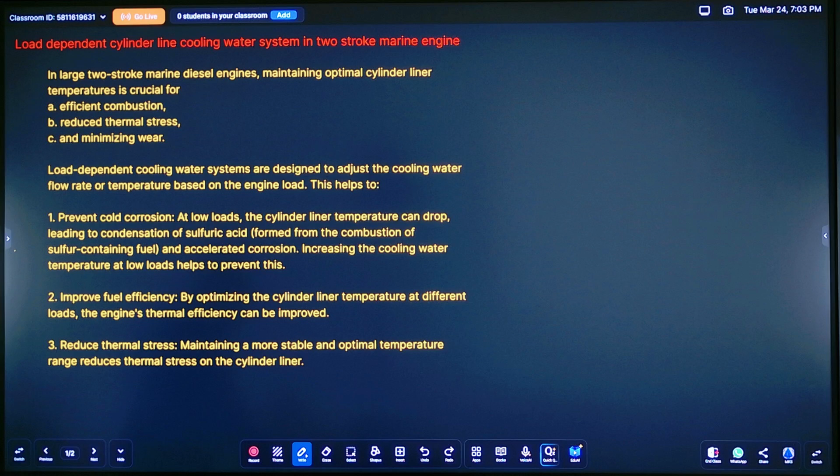So let us learn about the load dependent cylinder liner cooling water system in two-stroke marine diesel engine.

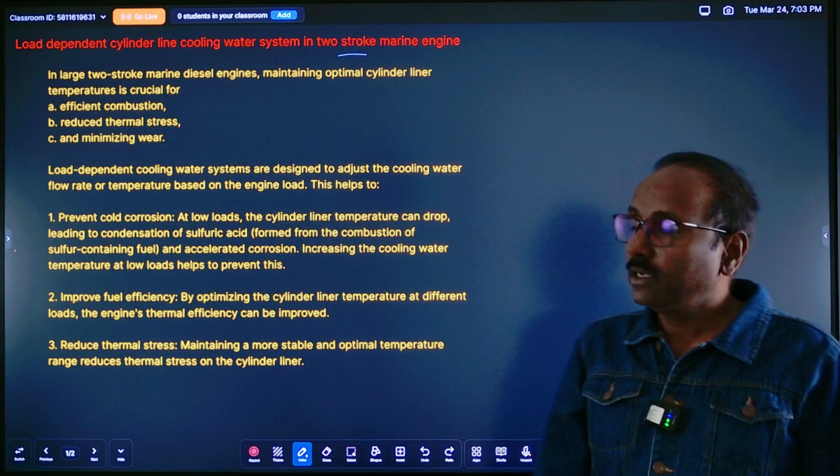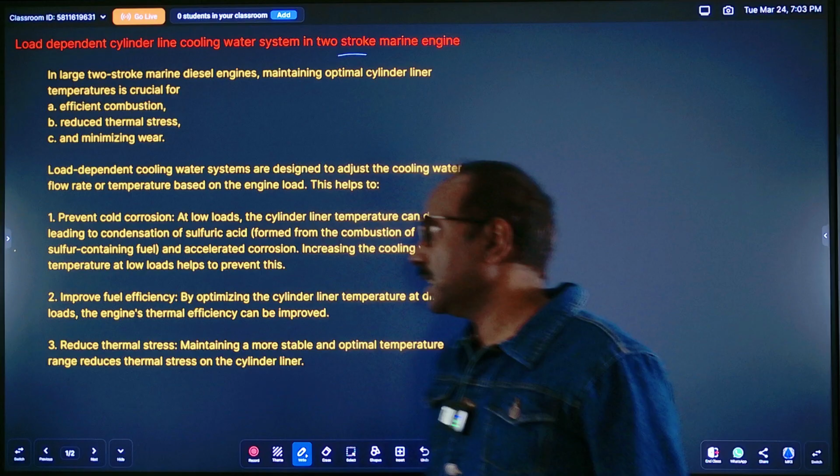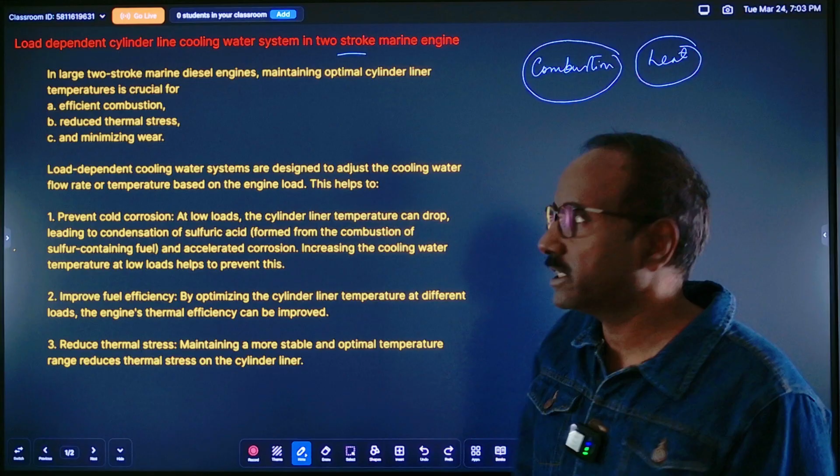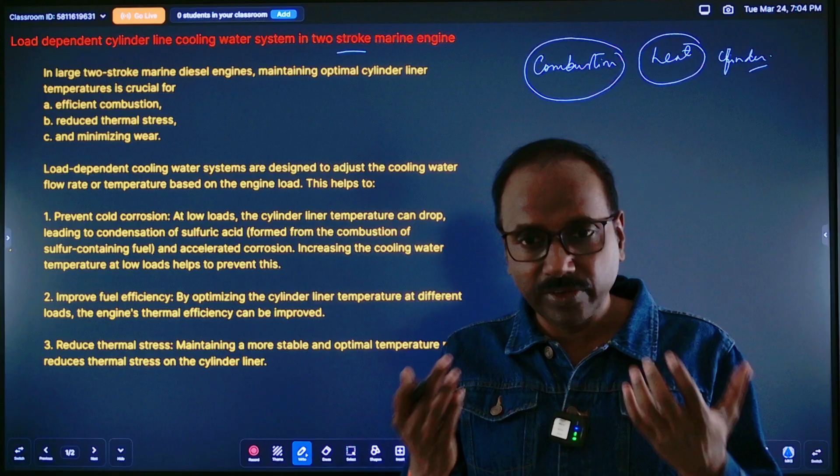See what is happening in this. Why do we need first the cooling of the cylinder liner? Because inside the cylinder liner combustion is taking place. Due to this, heat is getting generated. So this heat will keep on transferring to the cylinder liner if we don't have cooling water system. So the liner temperature, the cylinder head temperature, your exhaust valve temperature will keep rising, rising, rising, because you're not taking away the heat from these surfaces where the heat is being transferred from the combustible gas, the combustion.

So for that reason, cooling water is provided. For that reason, cooling water system is provided.

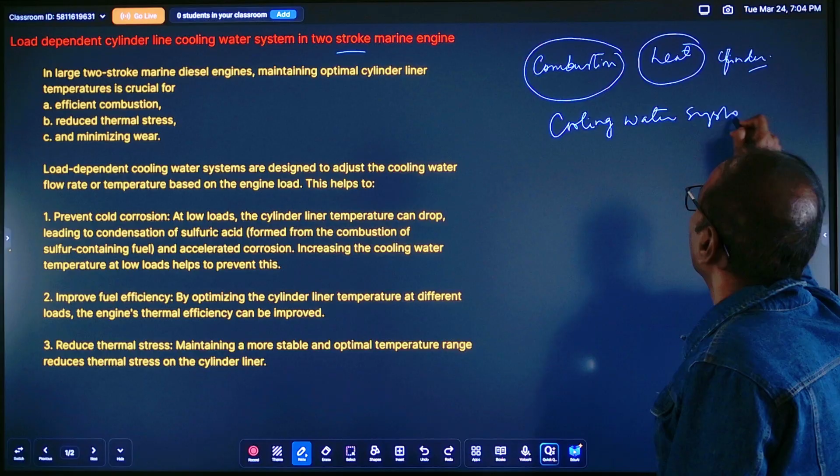In conventional system, the cooling water was sent through the jacket which is surrounding the liner, and after coming out from the jacket it was entering into cylinder head and then to exhaust valve, cool down and return back to the expansion tank through the orifice.

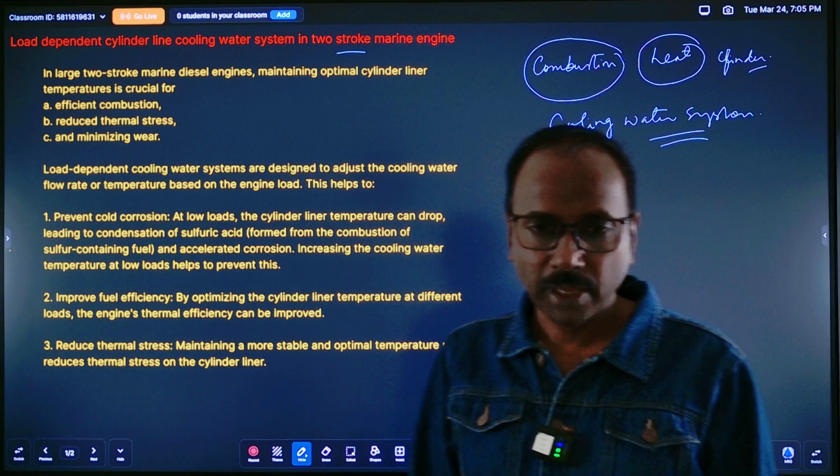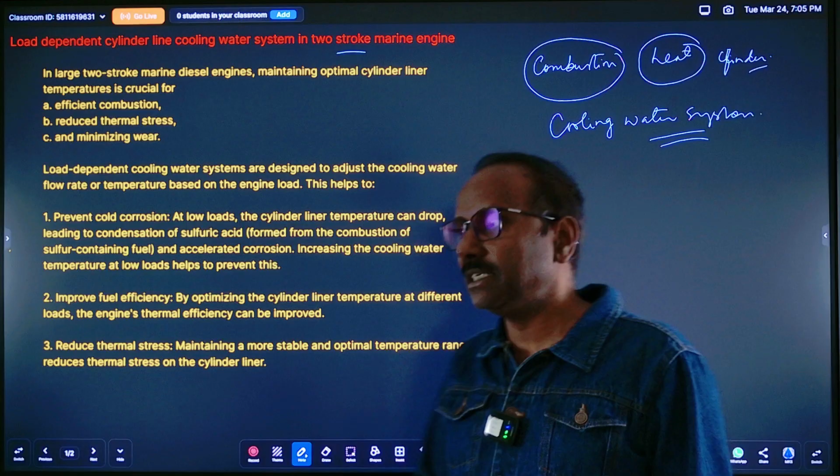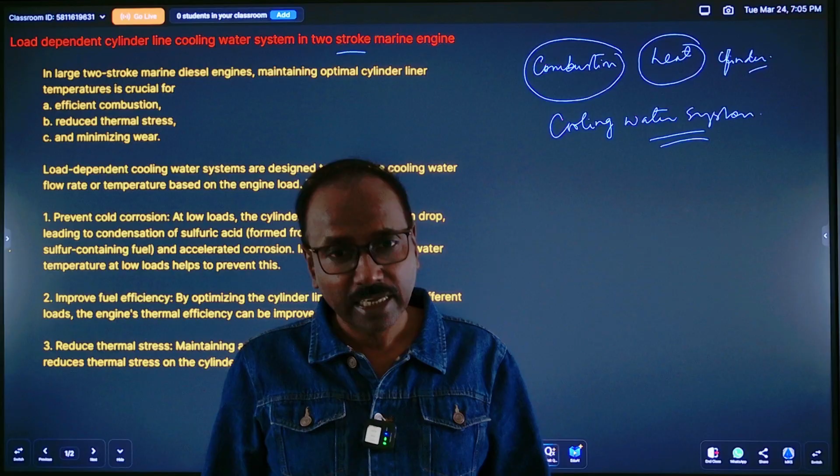In conventional system, the flow of water was maintained the same. So it means if the load on the engine changes - see, the marine engine is designed for running at different load, at low load, high load, normal load. So when the load increases, the transfer of heat to the liner, cylinder head and exhaust valve increases. So there you need a system, the cooling water system, which maintains the cylinder wall, that liner wall and exhaust valve in a designed operating optimal range.

So suppose the manual prescribes that okay, at high load you should maintain the inlet temperature 70 degree and outlet temperature 85 degree. So this full flow of water is doing that, is solving that purpose.

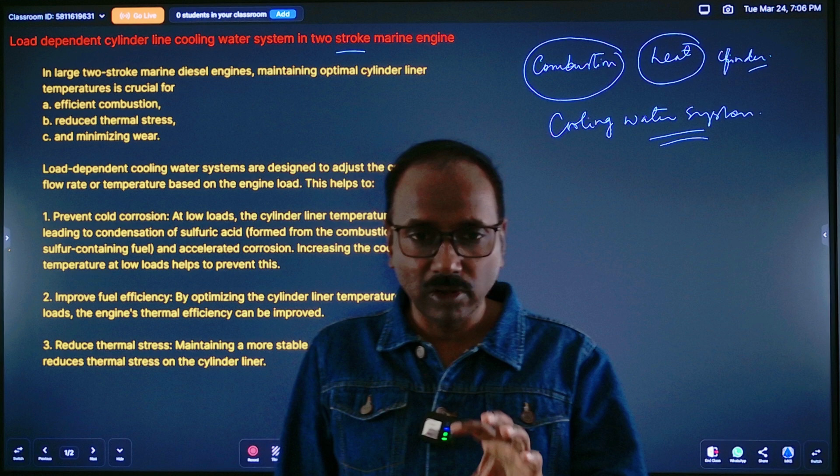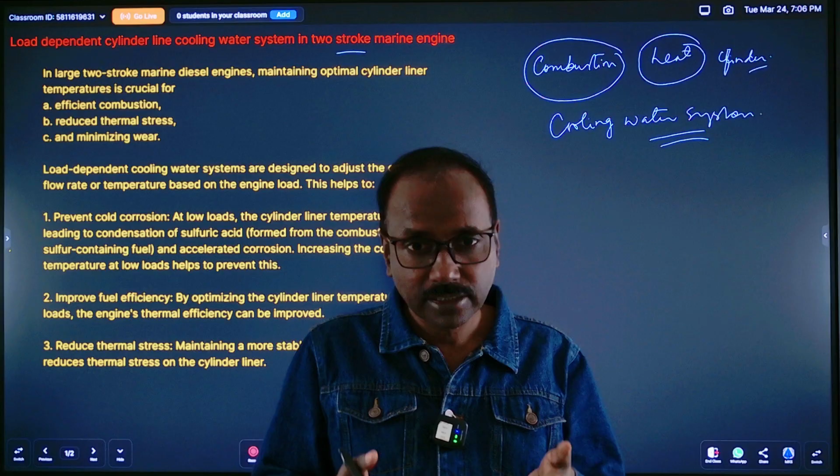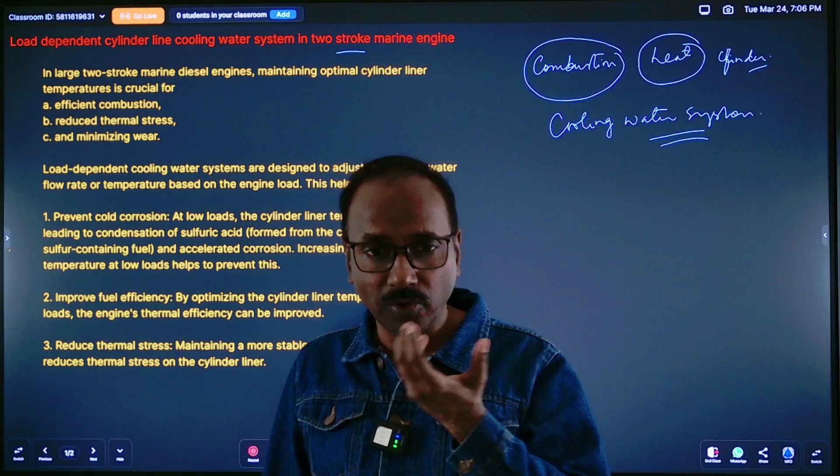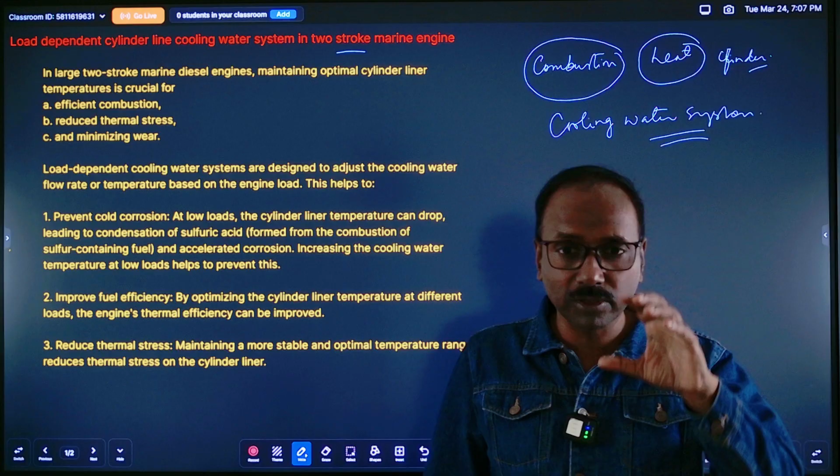Now when the load is low, the heat is not much inside. So liner temperature with that flow of water will definitely come down, though you have set the temperature to a higher level, but still it will come down. So this coming down of the temperature of the liner wall is dangerous, because once the temperature inside the cylinder liner or inside the combustion space drops below the dew point of the vapor, dew point of the vapor,

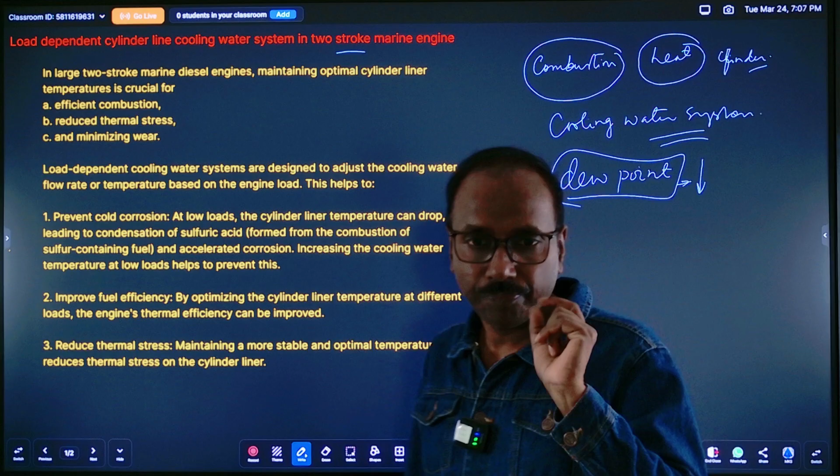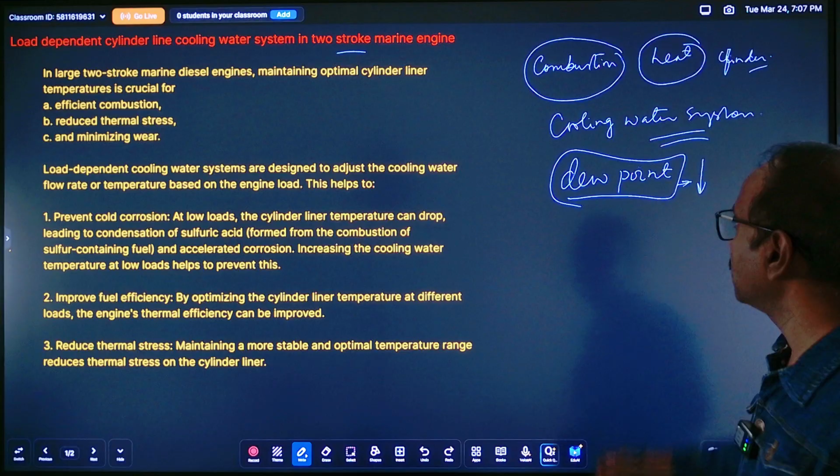you know that air is having the water vapor also. So if the temperature falls below or to this level, the water droplets will form. And in fuel there is sulfur. So when it burns, it produces the oxides of sulfur. So that oxides of sulfur are easily dissolved into the condensed water droplet, and form the acid. And you know that the acid is highly corrosive for the metal.

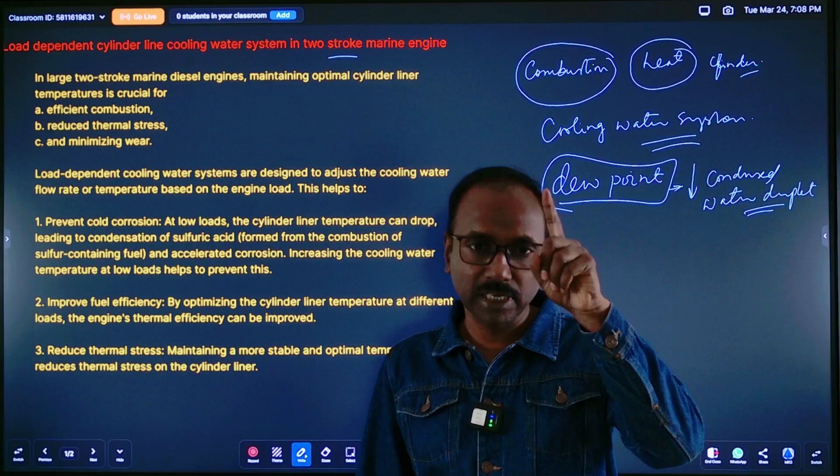So it will start corroding the metal. So wherever it is getting deposited, like on the liner surface, if it is getting deposited, it will start corroding it, eating away the metal. If it is on the cylinder head, it will start the corrosion in that location and it will eat away the metal. Same way for the exhaust valve. So whichever path it is passing through, wherever it is forming the sulfurous and sulfuric acid, it will cause damage.

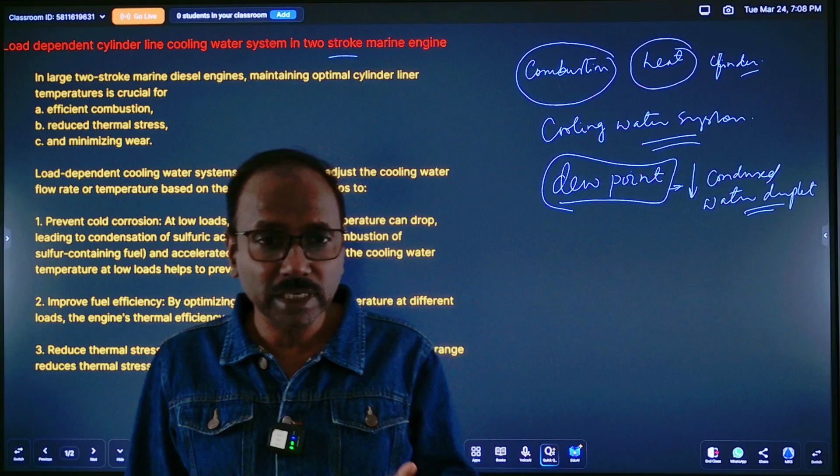So running the engine at low load is a challenge. How to maintain the temperature inside the cylinder or cylinder wall temperature to such a level where it does not come down below the dew point, so that water droplets will not form, and gas and water vapor in the air will pass out in the exhaust system.

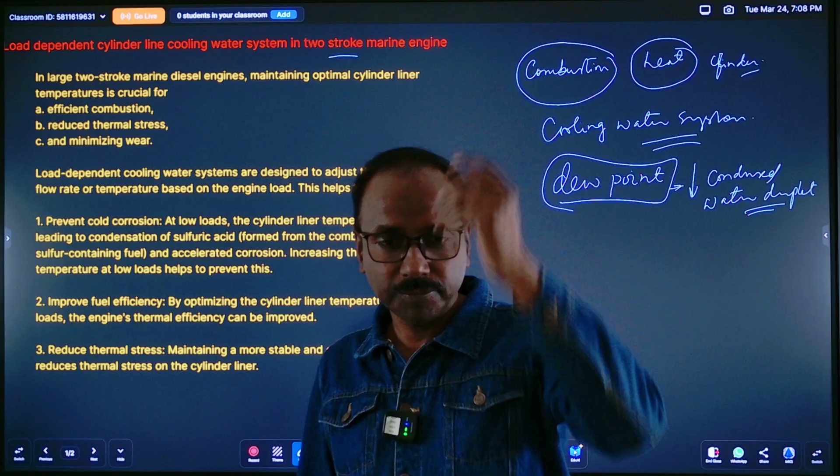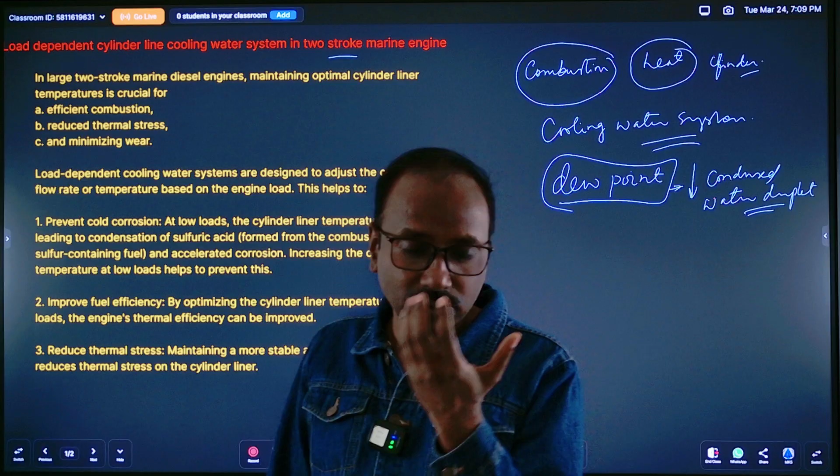So for that reason, an additional system has been introduced that is called LDCL, load dependent cylinder liner cooling water system. An additional pump is installed in addition to your jacket cooling water pump. And this pump with the flow control valve solves the purpose of keeping the jacket cooling water inlet temperature to the liner at higher degree, so that the liner temperature, wall temperature does not fall below the dew point.

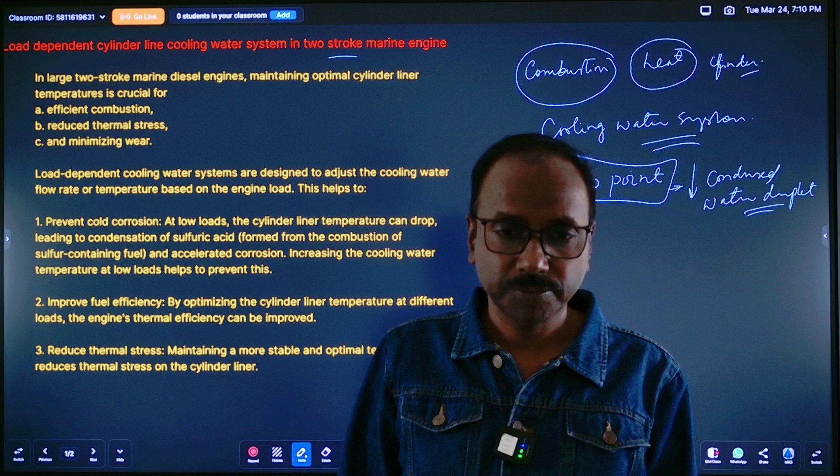So this way you can avoid the condensation and the cold corrosion. This is called cold corrosion because the engine is running on low load, it is generating less heat, so liner temperature has a tendency to fall down if we run with the conventional system of cooling water system. But with this system, in addition, you are keeping inlet temperature itself at higher degree, so that wall temperature does not fall below the dew point. So one thing, the LDCL system will prevent the cold corrosion.

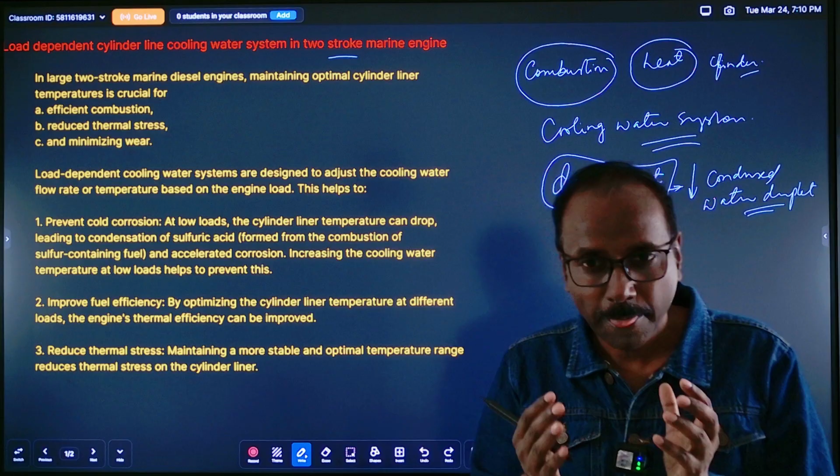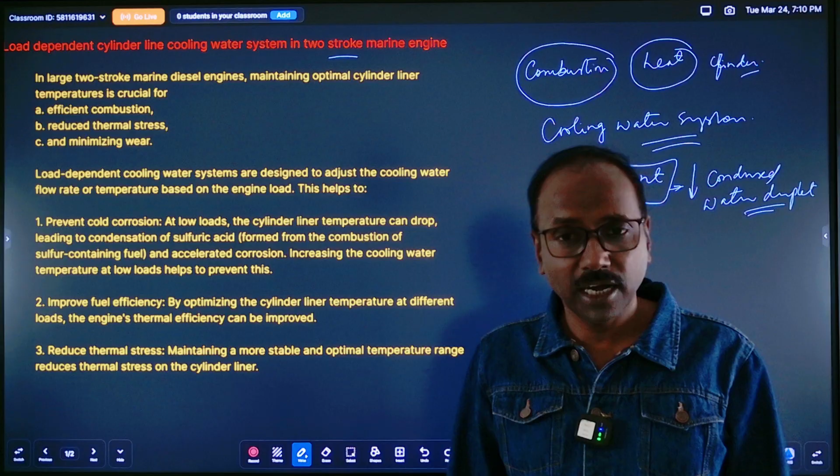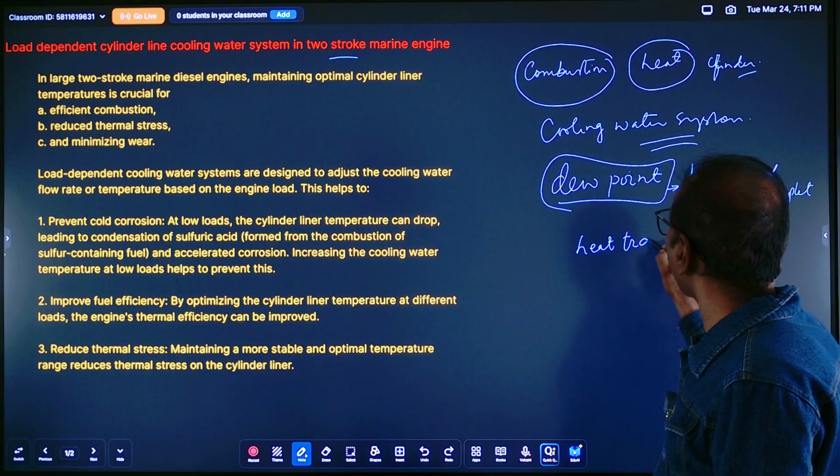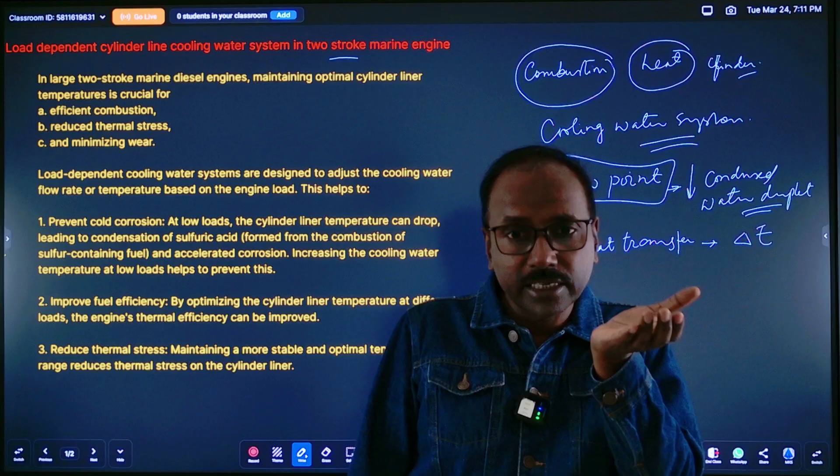Second thing, when the liner temperature is optimal, to a design level, higher at low load, so your thermal efficiency will be higher. Why? You know that heat transfer is depending on the temperature difference between the two bodies. So if your liner temperature itself is at higher temperature and the cooling water temperature also is at higher level, so the difference will be less, and that is why less heat will be transferred to the cooling water, and by this means liner temperature we can maintain at higher degree.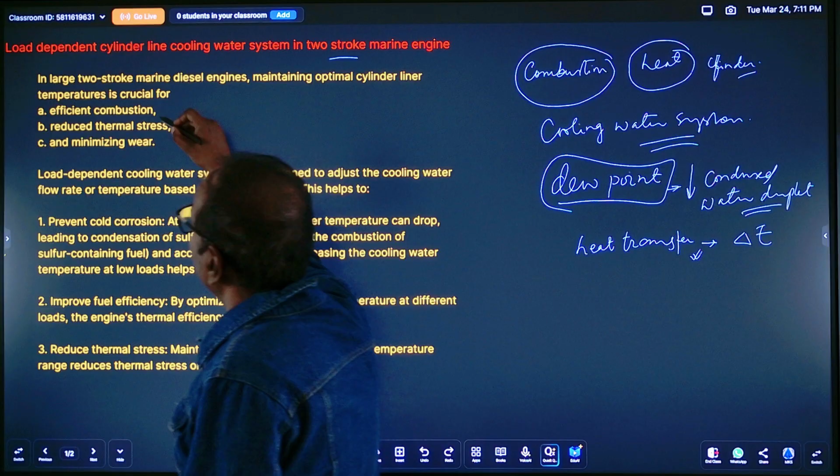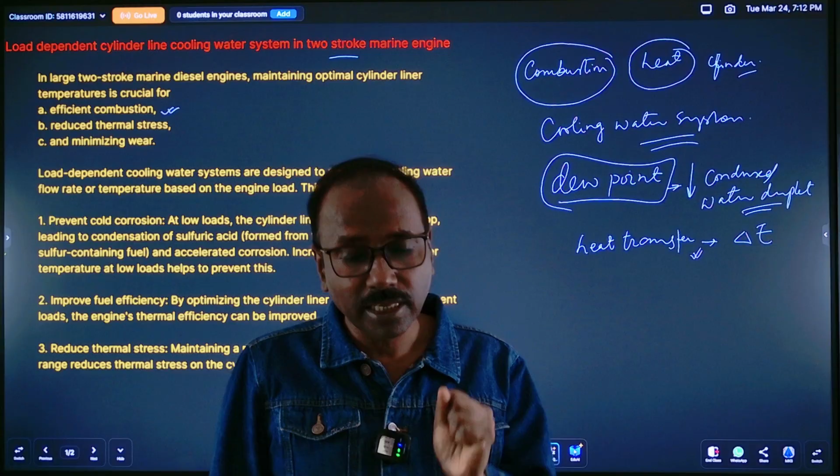First thing, efficient combustion. Like I have written in the point over here, efficient combustion. How does the higher liner temperature at low load aid to this efficient combustion? For the combustion, what you need - because it is a compression ignition engine - so when you compress the air, the temperature rises and the fuel is injected at that temperature, the fuel ignites.

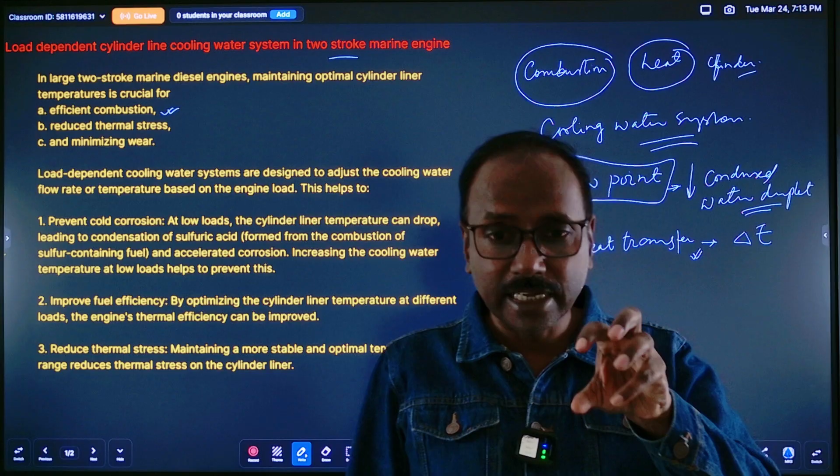But when your liner temperature itself is low, so when you are compressing the air, it will reach to the ignition temperature but not evenly distributed. Maybe at some location the temperature will be less, at some location it will be higher. So the places, the location where the temperature will be higher, the fuel will burn first. And maybe when your piston is coming in the downward stroke, the combustion of the fuel injected becomes little late, so you will get the lesser high peak pressure. So with the lesser peak pressure, you will be able to extract lesser power from the combustion of fuel. That is what it means, efficient combustion.

Reduce thermal stress.

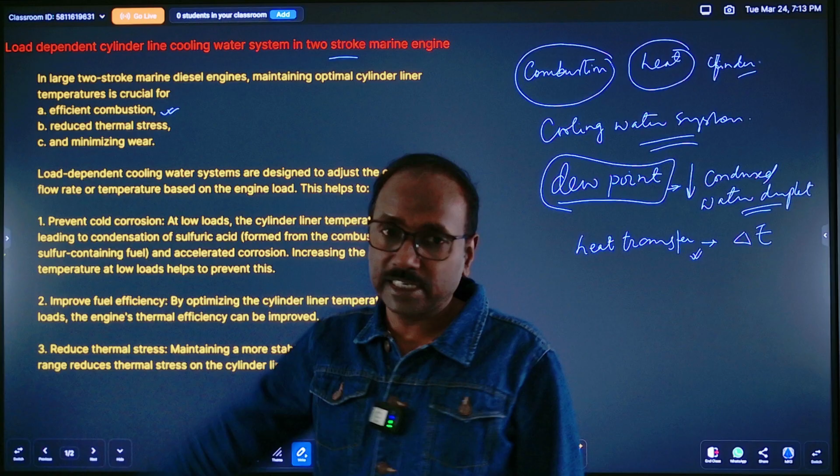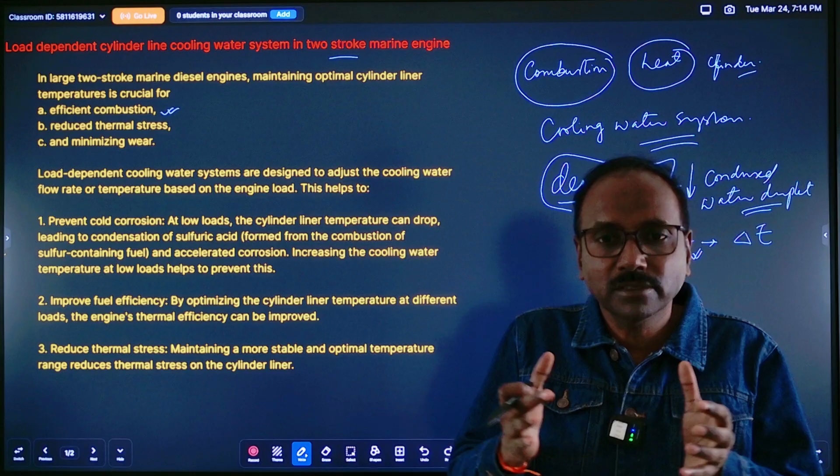When the temperature of the cylinder liner itself is at a higher level, the thermal stress will also be less because the heat transfer now is less. If the temperature difference is too much, it will become cooler. Cooler means it will shrink in, the dimension will reduce. Hotter means it will expand. So by running it on higher cylinder wall temperature, your thermal stress will also reduce.

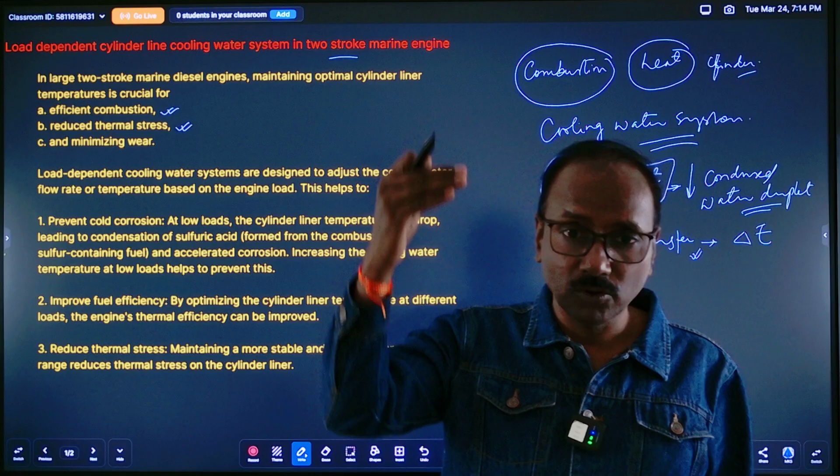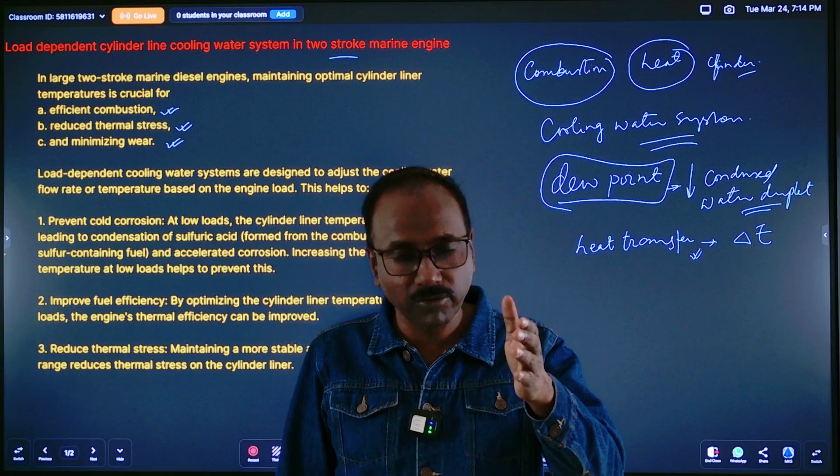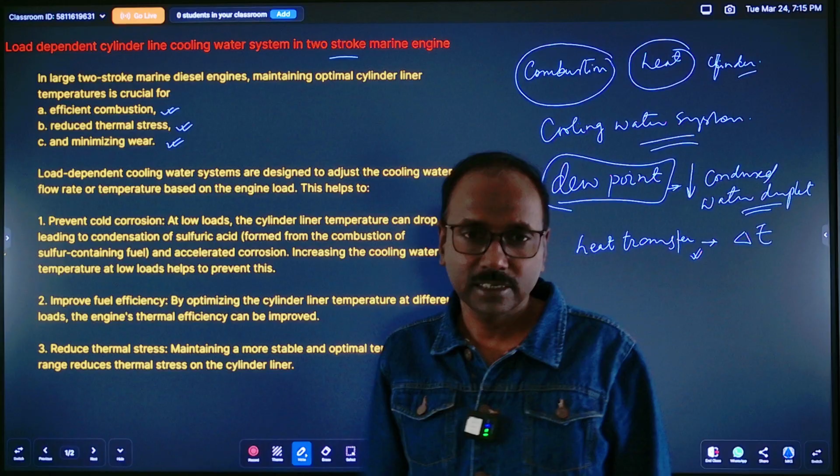Third thing, no condensation inside the cylinder liner wall, so your cylinder lubrication film will be maintained and it will reduce the wear. If not, if the water would have formed, condensation would have occurred on the cylinder wall, so your lube oil will wash away. In that area, there will not be an oil film between the piston ring and the liner, so mechanical rubbing will start, and that will increase the wear rate. So by keeping the higher temperature, you are controlling or minimizing the wear also.

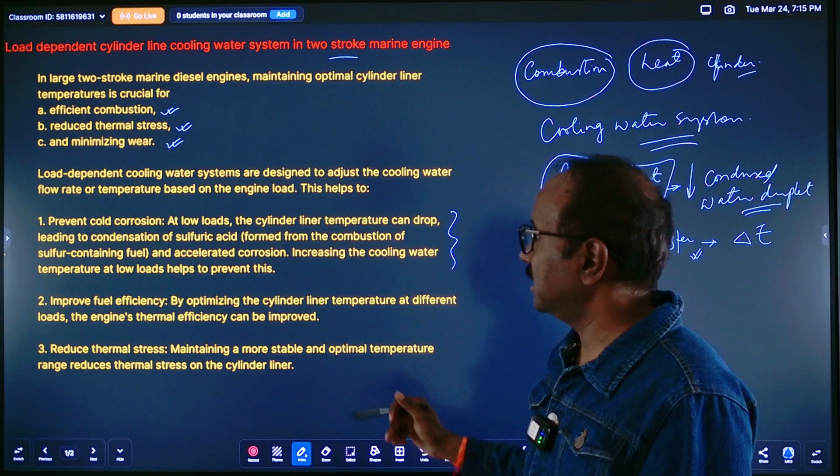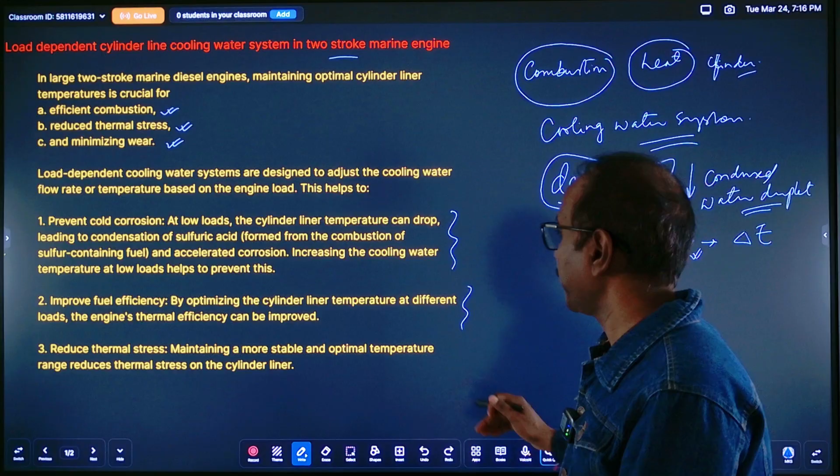So these are the points which has been written. You can go through, like prevent cold corrosion. At low loads, the cylinder liner temperature can drop, leading to condensation of sulfuric acid and sulfurous acid and accelerated corrosion - increasing the cooling water temperature, which I have already mentioned. Improve the fuel efficiency, even temperature inside the cylinder, so that when the fuel is injected in atomized condition, the burning will be smooth. Reduce thermal stress.

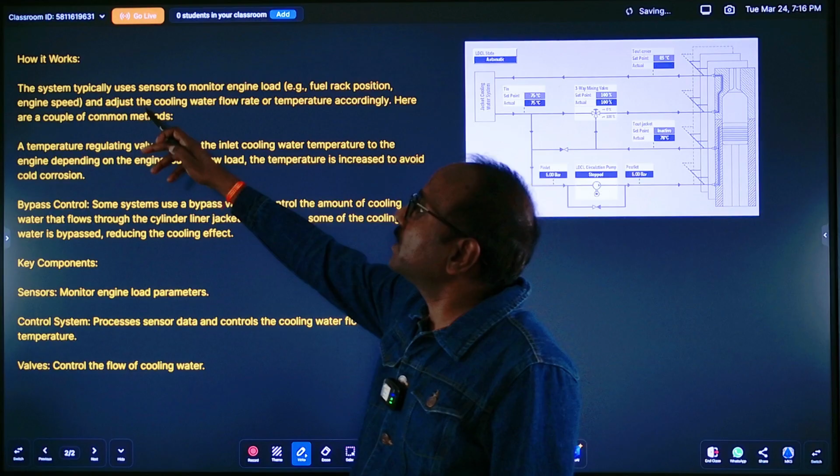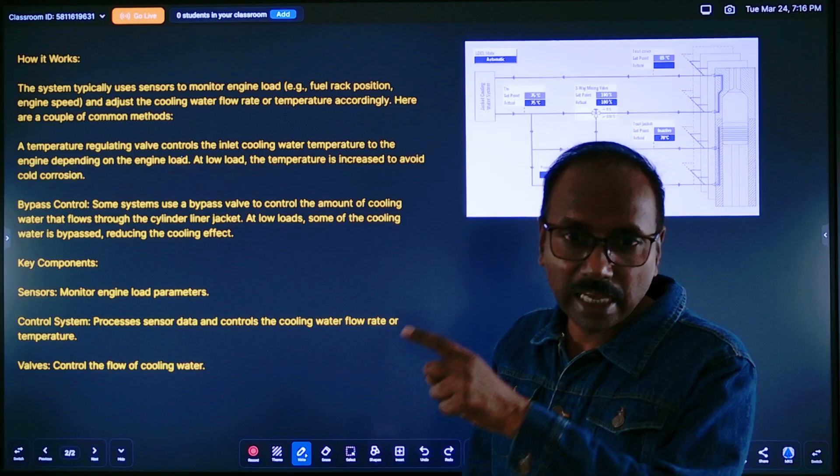How it works? The system typically uses sensors. LDCL is having the sensors which senses the load on the engine, the temperature sensor, to monitor engine load. And if it senses that the engine is running on low load, the flow of the cooling water through the cylinder liner, it will reduce. So in one cycle, the temperature will increase. So for that, you have the temperature regulating valve controls, which controls the inlet cooling water temperature to the engine depending on the engine load. At low load, the temperature is increased to avoid cold corrosion.

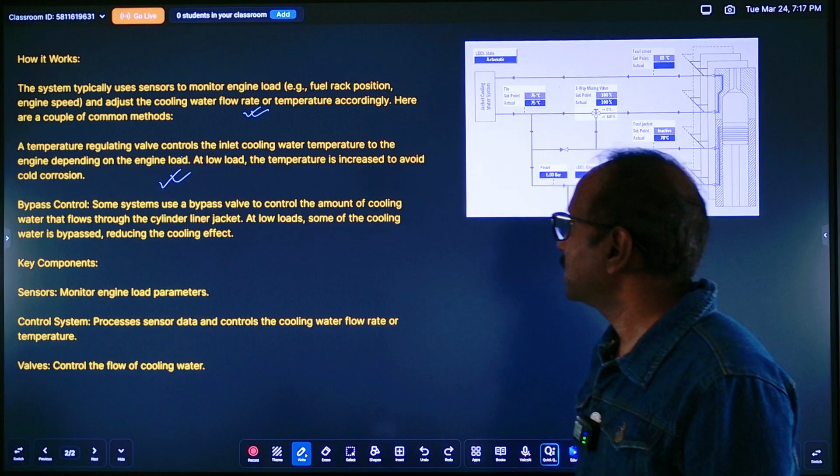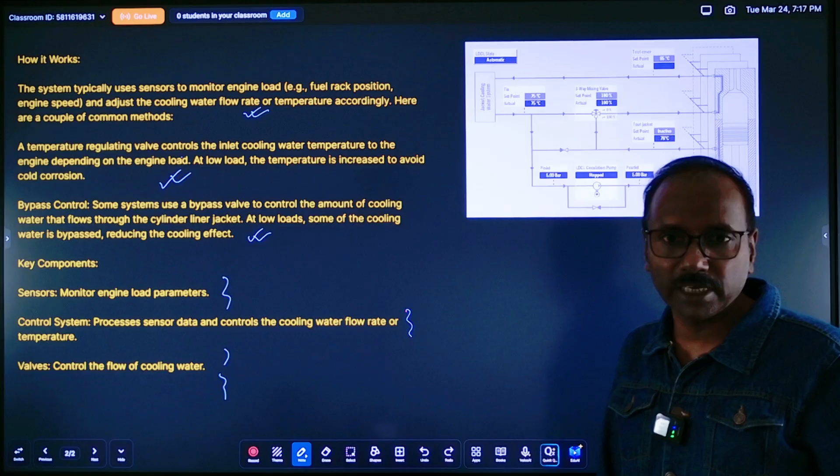At low load, the temperature is increased to avoid cold corrosion. Bypass control - some systems use a bypass valve to control the amount of cooling water that flows through the cylinder liner jacket. At low loads, some of the cooling water is bypassed, reducing the cooling effect. So key components of the LDCL system are the pump, sensors, control system, and control of the flow of cooling water. So you can go through this - this is self-explanatory, and this is the diagram which you can understand.

This one is your jacket cooling water system. From the jacket cooling water pump, the water is pumped. It goes to this line where it has the three-way valve, and it also flows in this line. It has a non-return valve over here, so this water will not go this side - rather, the water can come in this side because this is a non-return valve. So this water will come here, it will go to the LDCL circulating pump, and then it will pass through and enter into the cylinder liner jacket. And from here it will come out and go to the three-way valve, and from there it will divert to the cylinder head and exhaust valve, and then after cooling it will go back to the jacket cooling water system.

So it will go to the jacket cooling water system. Now you can see what happens at low load. Your purpose is to increase the inlet temperature, meaning this one. So what is happening? If this is a variable discharge pump, this will pump lesser water through it. So lesser water means less cooling.

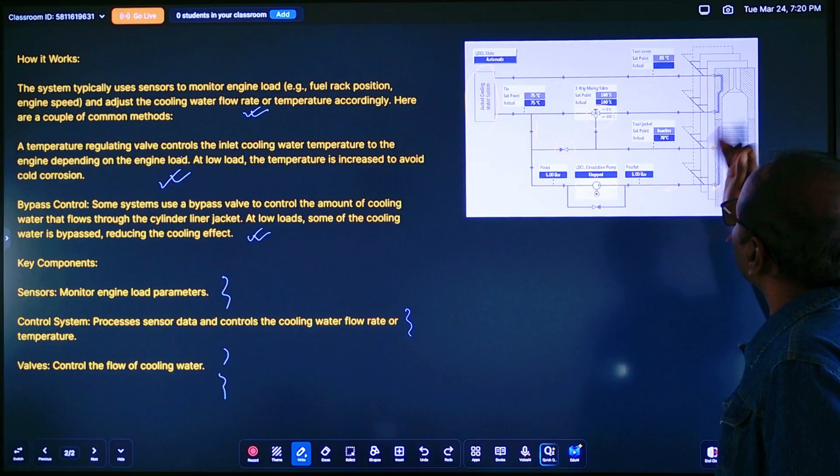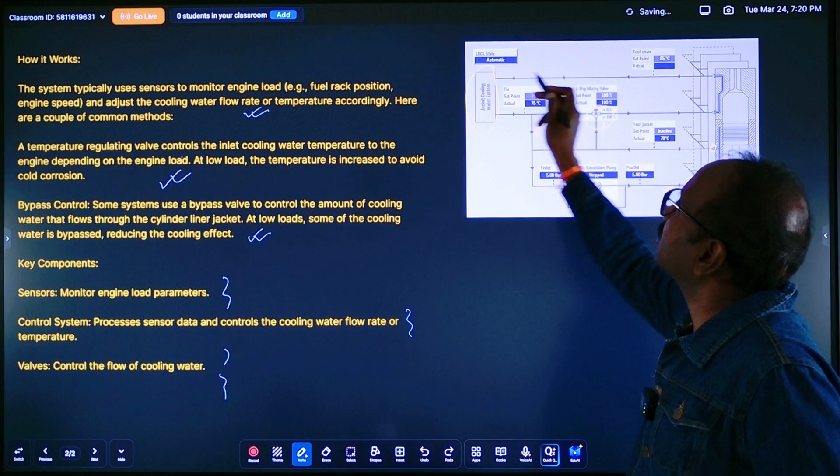So even if the water is coming at 75 degrees, it will do less cooling, and the cylinder liner wall temperature will be higher. And after cooling this, it will come out at a higher temperature, and this will go over here in the three-way valve. From the other side, your jacket water is also coming. So depending on which way this three-way valve is open - is it partially open this way and this way, or only this way fully opened - if it is open fully in this way, all the water coming out of the liner will go here and directly enter at higher temperature into your cylinder head and exhaust valve. So that way it will keep the temperature of the cylinder head and exhaust valve also at a higher level, beyond the dew point.

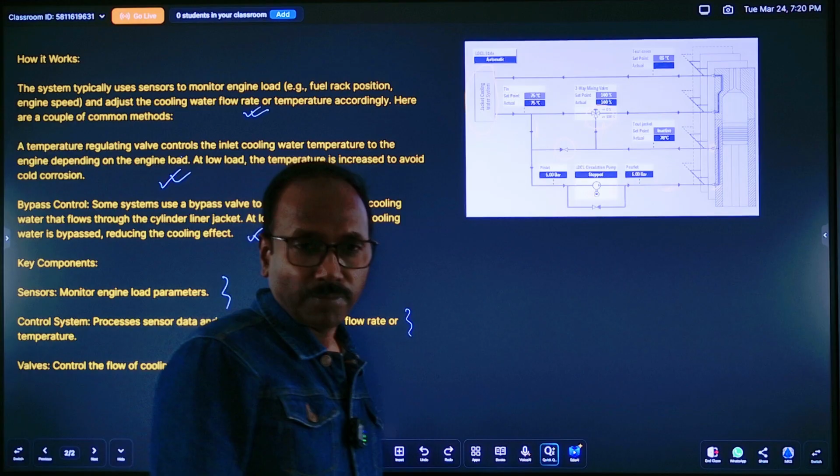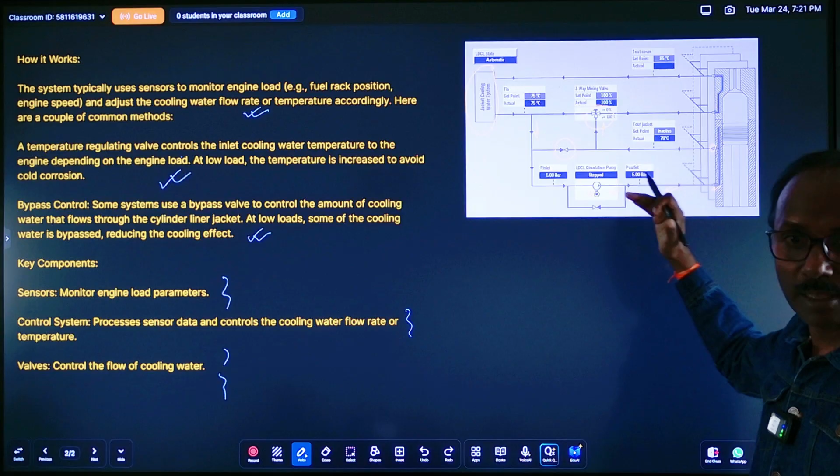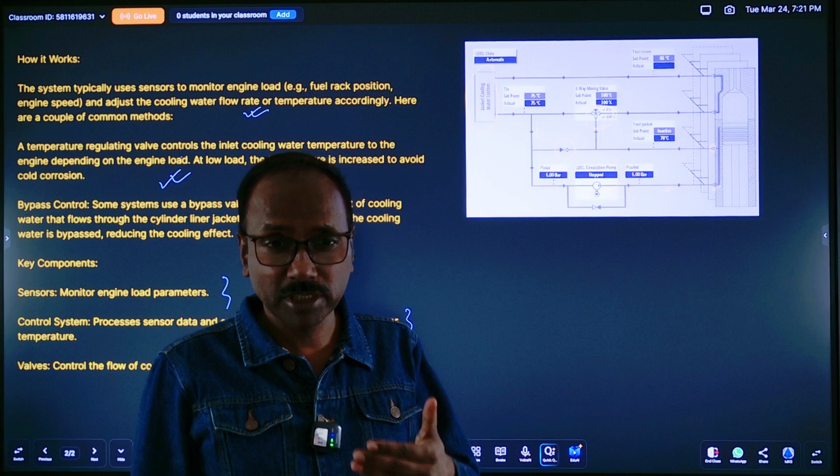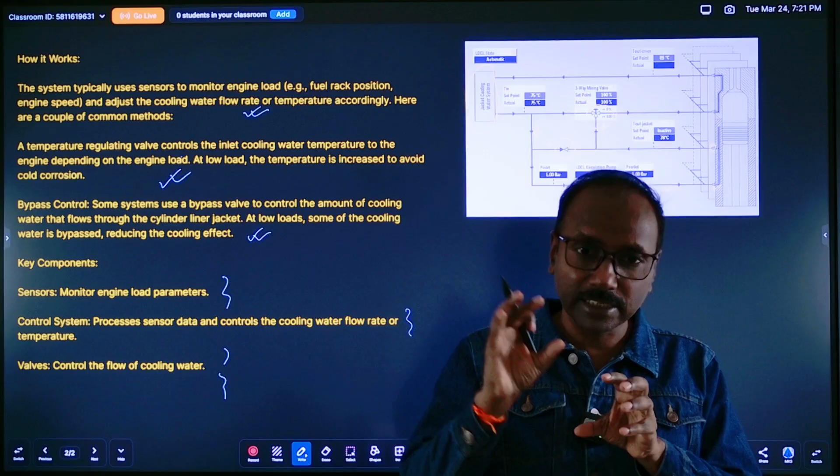So this is the way it can maintain the cylinder wall temperature. For that, the system will be having a temperature sensor or load sensor, which will sense the load at what the engine is running, and what temperature at that load should be maintained, will be processed through a control unit. That control unit will accordingly process that signal to send the water into the cylinder liner. If it is a flow control type, the flow will be less. When flow is less, the cooling will be less. The cooling is less, the wall temperature will be higher.

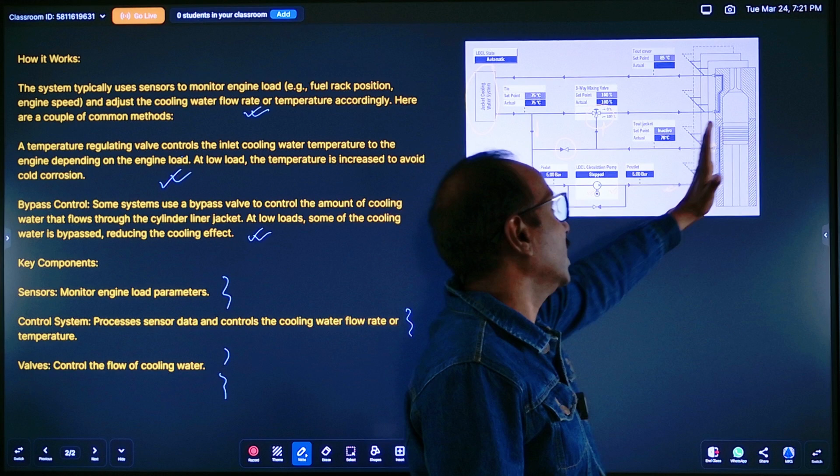So hopefully you understood the system. The main purpose is to prevent cold corrosion, improve the engine efficiency at low load, and reduce the wear, because wear will happen due to the droplet forming and lube oil film breaking.